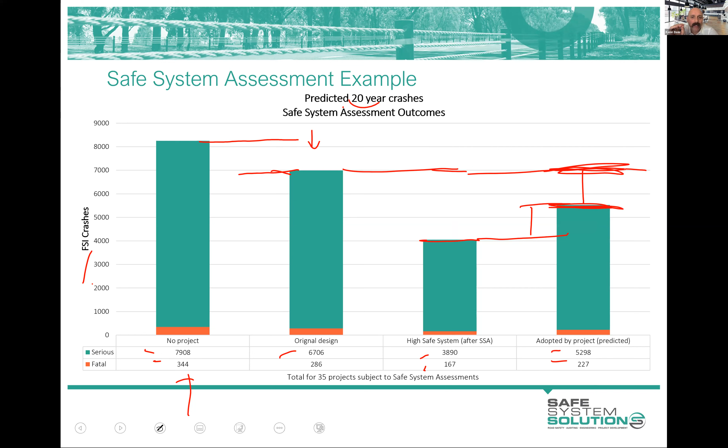But the difference between that and that difference, that's the immediate benefit of just going through the safe system assessment process. Because all of these original—no, I take that back, not all of them—I think it was 32 of the 35 or something like that, very close to all, had been the subject of a feasibility stage road safety audit. So it had that independent set of designs, and it had a little feedback loop, and it had been improved.

So this then goes to showing, just by the process, that you now understand that process and you've been through it, has the ability to get us that sort of gain by the alterations in the project—adding new things, altering things. So that's pretty exciting.

That's really exciting. The other thing that I suppose is of quite a bit of interest to me is this. We established pretty much straight off the bat in this course that the safe system is underpinning Vision Zero philosophy, trying to target zero deaths and serious injury on the road network going forward. We talk a lot about that—that's our aspiration. And so we're doing these safe system assessments, and even our highest safe system alignment is still got this residual of death and serious injury if they implemented everything we're saying.

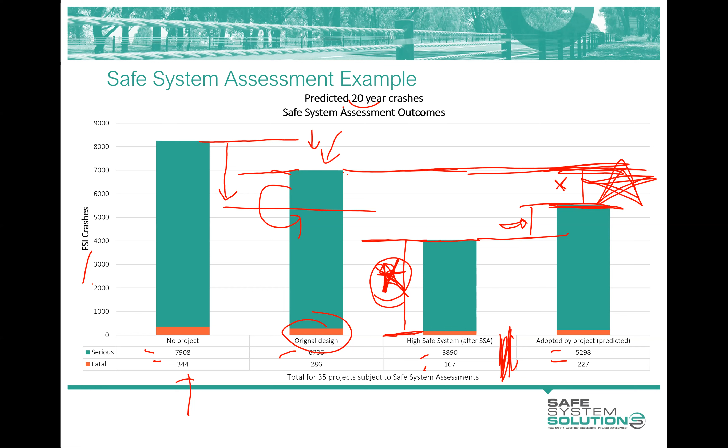Okay, all right. Well, I hope that sort of gives you a bit of an insight into, I suppose, some of the immediate value we can get.

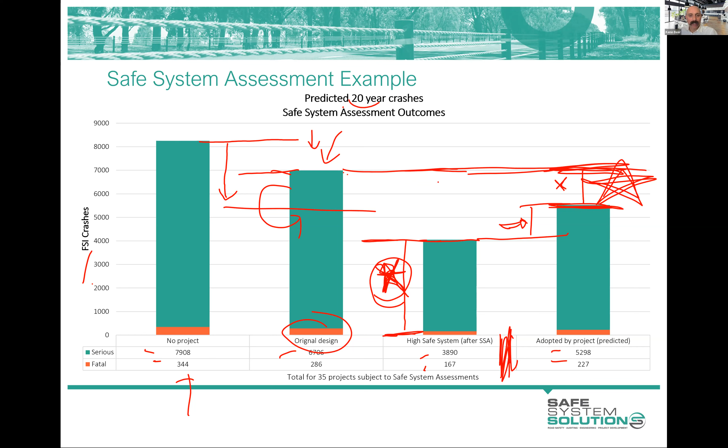Also setting expectations that the practice of doing the safe system assessment isn't going to eliminate death and serious injury. It's going to play a decent contributing role, but we need major, wide, holistic interventions across all sorts of areas, and we'll continue to work on that. Others are working heavily in that space, and you may be involved in that.

I took these dot points out of the Victorian Safe System Assessment Guidelines. I thought they were quite nice. I don't like slides with this many words, but I'll just quickly go through them. It lists some benefits of a safe system assessment - a way of determining how well a project aligns with safe system principles. I think you've already seen that.

Method to compare project design options from a safe system assessment perspective. And that's something that you've only got one design option to look at, but you could imagine if they had different design options at that intersection you're doing yours on, how you could score those and then get that comparative scoring, and you saw that in the example. Information on design changes that will move a project proposal closer to safe system objectives of eliminating the risk of fatalities and serious injuries.

Method to assist planners, designers and managers to move the safe system approach from theory to practice. And I think that's a really good one. It's too airy-fairy when you talk about principles of safe system.

Aspiration of no death and serious injury, humans make mistakes, shared responsibility, human tolerance to physical force. They're great principles that everybody generally gets on board. Executive directors, chief executives, ministers, they all sign up to it, but our decisions on a project on the ground, it's hard to sometimes translate those to practice. And this is that sort of conduit to do that. It's one of the ways we can really help do that. And it's a sound basis for future planning, design, and road infrastructure.

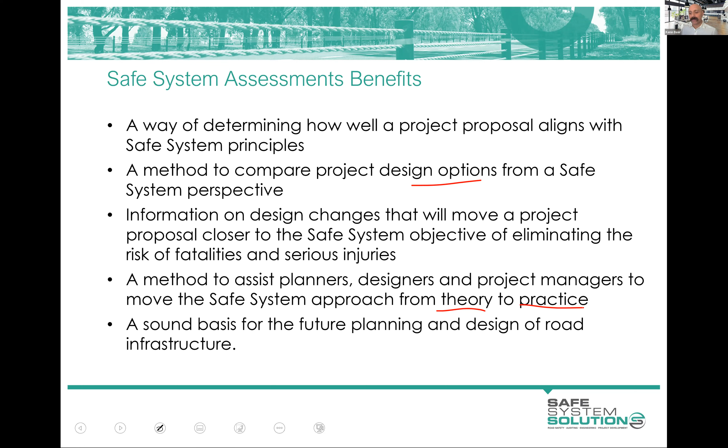But yeah, really important. The things you do to relax on a Thursday night, Ken, are different to, I think, what most people do. But I have shared that on Moodle.

There's a question that's come through. Once qualified, is there a period of on-the-job accompaniment we have to do with another accredited assessor, like the RSA system?

So I will cover this off shortly around what the different sort of accreditation schemes around the country are, and the like. They are nowhere near as advanced as road safety auditing is from that sense. A lot of jurisdictions, pretty much, you successfully complete this course, and that's it - you're out there doing it, off you go. But I'll show you a few other jurisdictions are doing shortly.

So good question there. Okay.

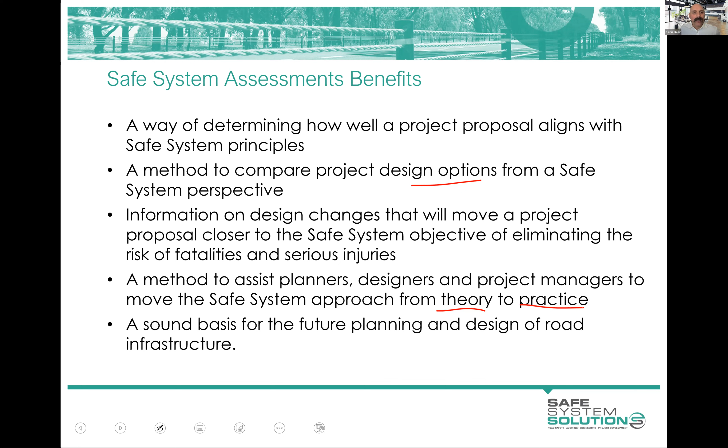Now we are going to have a break at some point, aren't we? How long have I drifted off down my tangents on? Okay, no, we're doing all right for time.

Let's talk about process guidance and the registration accreditation of what has started already. I alluded to this quite a bit, but the early stage safe system assessment is good within a project. If you take the project life cycle, a concept is developed, then drafts and details are put to it, then it's constructed and then open to traffic. The safe system assessment serves the purpose beautifully at those early stages.

Once you've got some meat on the bone of your design and you're moving into that stuff, I don't particularly find safe system assessments are the right tool. You can use them, but I'll tell you about a team I was in doing a safe system assessment that was basically about to be issued for construction. The project team said, well, we want this to align with safe system principles, so we should do a safe system assessment. So we're talking detailed design done, basically.

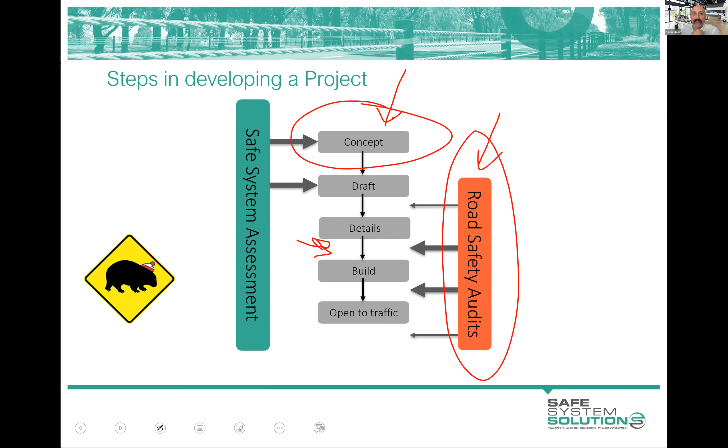Now, this is interesting. I did a little bit of a comparison early on, and Kathy will laugh because on the weekend I did an updated table of the difference between safe system assessments, road safety audits, and AusRAP, which I mentioned earlier, the Australian Road Assessment Program based on iRAP, just because I thought there was more to this. People often ask, what's the difference between a road safety audit and a safe system assessment? And then, what's the difference between AusRAP and safe system assessments and audits?

I completely sympathise with people on this, because it's getting complicated with the amount of assessment methodologies and tools available. They just keep coming, and that's all good because people are trying to find ways to integrate this. But I think we need a bit of clarity around what the differences are, where you'd use them, and what the purposes are.

So I did that sheet as well. I haven't actually put that anywhere yet, Kathy, so maybe we could send out an advanced copy of that to this group. I'll send that to you after the session and we can load it somewhere.

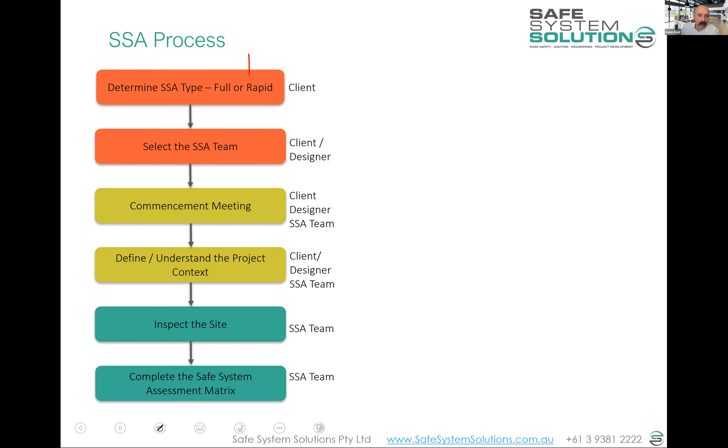Getting out on site, having a look there with the team - how does it interact with the existing road environment? How does it tie in? How are people using this area? The matrix which you're using at the moment, other safe system elements - as we talked about, those qualitative questions about people, vehicles, post-crash care. Treatments to improve safe system alignment - so recommendations, essentially we often call them things for the project team to consider, considerations.

It's all written up in a fairly consistent manner, and you're starting to use one of the templates already, so we're fairly consistent with that. Then it's all handed over, and the designer, the project manager, the client responds to those changes or suggestions, and amends the design and the project to incorporate what they've agreed they can actually do. And then those are taken forward.

So sometimes at about this stage, there's a little feedback into doing one more scoring of the final design, so that you can create a nice little graph - remember lower scores are better here - of initial design, existing conditions, initial design after safe system assessment, initial SSA. Why would that be useful? Well, that's a pretty powerful thing to show your director, your executive director, your regional review committee, whatever it is. You've done everything you can as a project team to get the best alignment with safe system principles you possibly can, because you've had that independent check, you've integrated things in, and you've got it all the way down there. So I think that's a neat way to do things often.

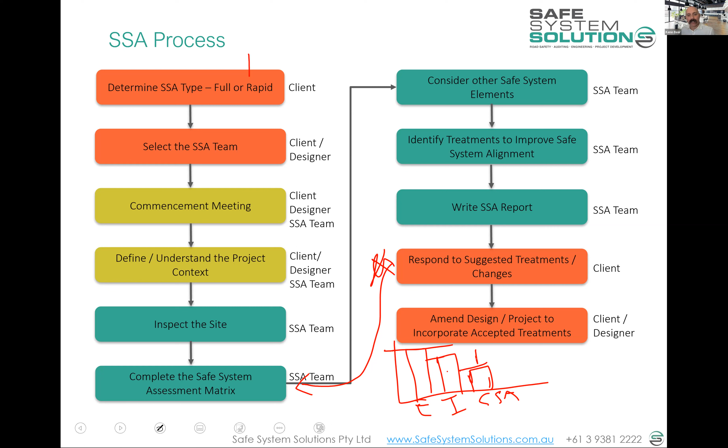Okay, so pop your questions in if you have any about the process, and I'll just show you a little bit about that accreditation registration, what some of the jurisdictions are doing.

As I mentioned, it's a bit varied across Australia and New Zealand what's going on. I'll talk Victoria first, then South Australia, then go to some other jurisdictions. Victoria has got a safe system engineering page on the VicRoads website, which will probably be the Department of Transport website at some point, but still VicRoads. They've got this safe system assessment section with the guidelines and the templates that you're using, and it clearly says please rebrand the templates, use them yourself, off you go.

But it's also got this register of recommended safe system assessors, and this bit talks about growing this list, and this is how you get on it. You express an interest to go on the list, although you don't really need to do that, but you can. You do this course, and it's actually specified there to do that. There is an option to do something else if it exists to get your head around it, but really, the practice is to do this course. Then you need to gain firsthand experience by undertaking a safe system assessment, facilitating a workshop, that commencement meeting, going through that, producing a safe system assessment, and then you submit that to the safe system assessment team. You email it through, and they review it and give you feedback. If they say yep, this person knows what they're doing, we're okay with that, you get onto this register.

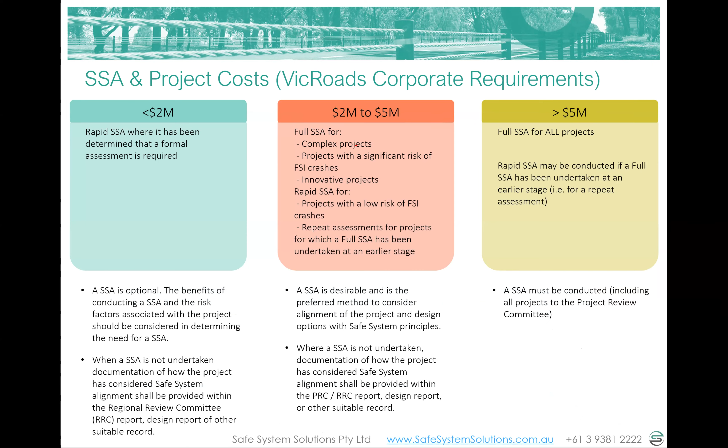Just back on the process, is the link between client, designer and SSA team similar to RSA? My experience is that the client delegates the response to the designer, the traffic engineer.

I would say in safe system assessment, the client is a bit more connected and engaged with that responding point. Yes, the designer is obviously going to be involved, but because of the nature of these usually being some significant scope alterations, there is a closer interaction with the client and the designer. Certainly the designer needs to ensure it's feasible and it can happen. The client, the project manager, the road controlling authority, whoever it is, is a bit more engaged in some of the wider implications of that - what they believe community acceptance would be, political acceptance, organisational policy, wider environmental cultural heritage, although the designer is usually very good at integrating that.

But there, I would say it's a bit more - whereas if you're in a detailed design stage road safety audit, for example, it's really the designer who can nut out most of those particulars, in terms of flare rate of barrier, or particular super elevation twist in the ramp, or those sort of things. They're so specific and nuanced that the designer can just close themselves away and nut that out.

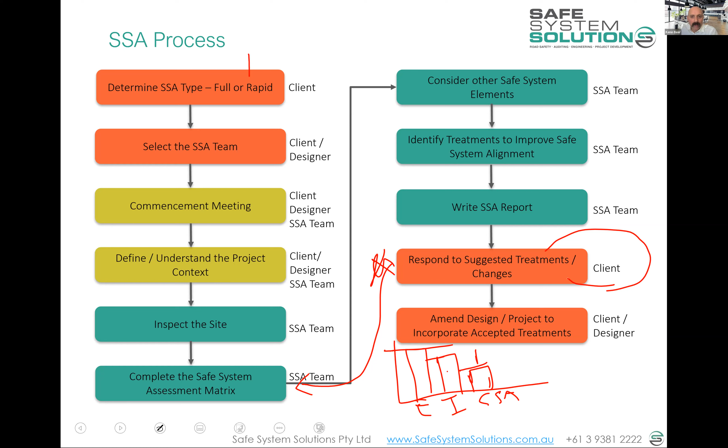And does the SSA team need to be independent from the designer client to avoid conflict of interests?

I'll give you a complicated answer on that. In theory, no, not as much. In practice, yes. The original intent of the Safe System Assessment Framework and how it was put out there was not to have it as a completely independent process, but to give project teams the ability to do this themselves, to think it through, to utilize that system.

In practice, most jurisdictions are following a similar line to road safety audits in that independence, and just saying, well, we will get independent assessments, safe system assessments done just the way we would road safety audits, because it's clean, it doesn't have any conflict of interest and the like.

But I suppose the slight difference is, if you have your own project, you can run through the safe system assessment process and the matrix and get some scores out to help inform what you're doing. That's a nice internal process to do. It's usually when it's put forward to a business case and the like where you would expect to see some independent eyes on that. And now when I say independent, road safety auditing is kind of clear cut on that, real determined independence.

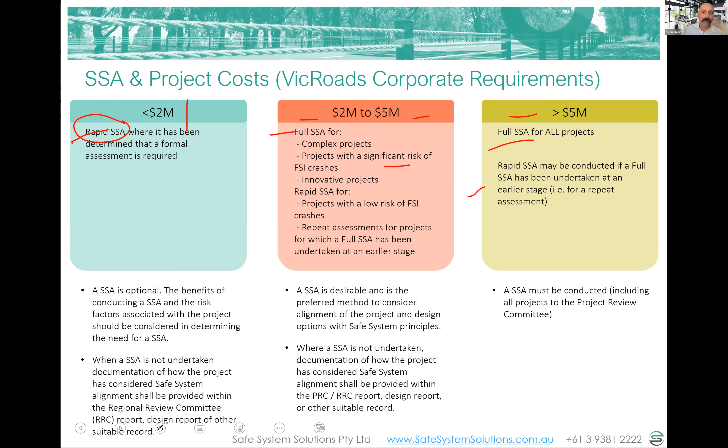And what is that difference? Well, it's not like one is a 5-minute exercise and one's a 5-week exercise. They're actually somewhat close in scope. The full safe system assessment has that commencement meeting, looking at the background, workshops, site inspection, existing conditions, and all the design options are reviewed and matrices produced.

Those other safe system elements are looked at, proposed changes, the full report, and changes done by the project team. So the rapid has a few less of these. I'll just note the ones that may drop off. So the commencement meeting may not happen, sort of commencement meeting, workshop, discussion about that.

The workshop, that may not happen. Site inspection may not happen as well. Now, most rapids, people still do a site inspection, but there is that opportunity to do it at a desktop level.

You're still doing the matrix, but you don't consider the other elements of the safe system in a rapid, so you don't do those qualitative questions. You're really just spitting out the scores and the changes you believe from an infrastructure perspective. There's a lighter report done, and everything else is the same.

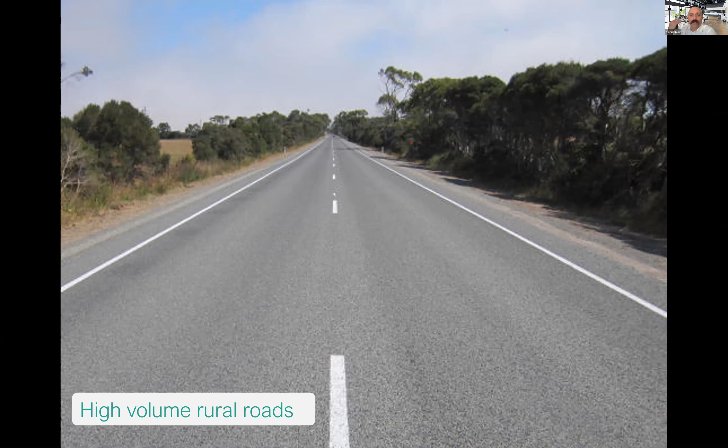These higher volume roads, the A roads, maybe B roads, the M roads and the like, are going to get the big investment, so the speeds can be higher, because these are providing those freight routes, those major connector routes in an arterial sense. So we would expect to see central barrier systems, outer barrier systems. It's going to cost a bit, but that's the price we're going to pay as a society to keep those bits moving at higher speeds.

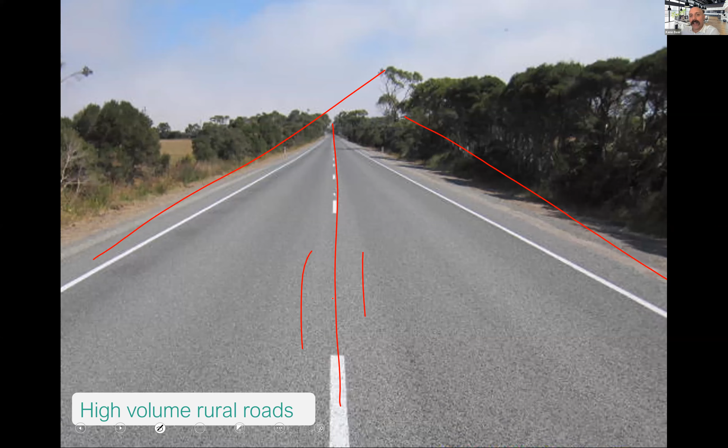We do want to see all the things to reduce the likelihood of crashes as well—audio tactile, widening the center line for the barrier, and the like. And when we get to intersections, we want to manage that speed and angles for passenger vehicles. It's a nice setup where you have central barrier systems and then a roundabout at a location like this. The reason for that is you can collect some access points and not have to have breaks in the barrier, and you can bring them down so they can U-turn if they need to go the other way.

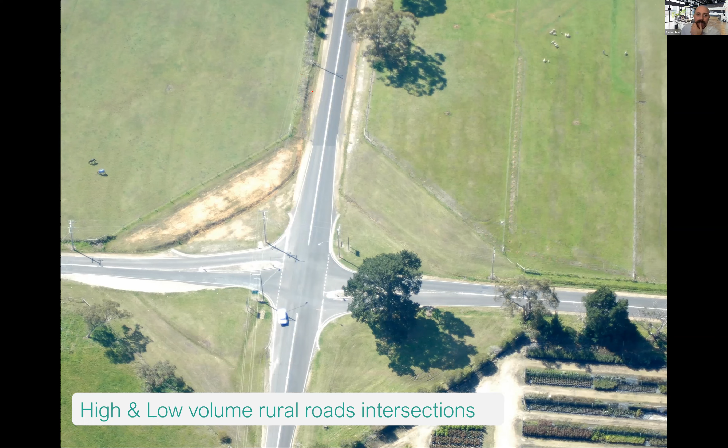So that's the theory on it. Yeah, it can be expensive. There's some good examples rolling out now. There's a good Austroads project in train on barriers in narrow medians and cross sections and the like. So keep an eye on that.

High volume outer arterials—these are generally major traffic routes often, and so we're looking at separation of vulnerable road users. We need to get that off there if we want to, because these get operated usually at 70, 80 kilometers per hour, and we can't have that.

To get high alignment with safe system principles, separation is required for vulnerable road users. These are often areas where we'd expect to see underpasses or overpasses for pedestrian separation, plus mid-block areas and intersections getting reduced speed through raised safety platforms, signalised roundabouts, or similar treatments to bring down conflict point speed and severity, as well as continuous barrier systems.

Moving on, if you're in these major traffic corridors, making it a little more like an urban motorway style with slower points at the key conflict points, and completely separated facilities for vulnerable road users, trying to achieve that separation.

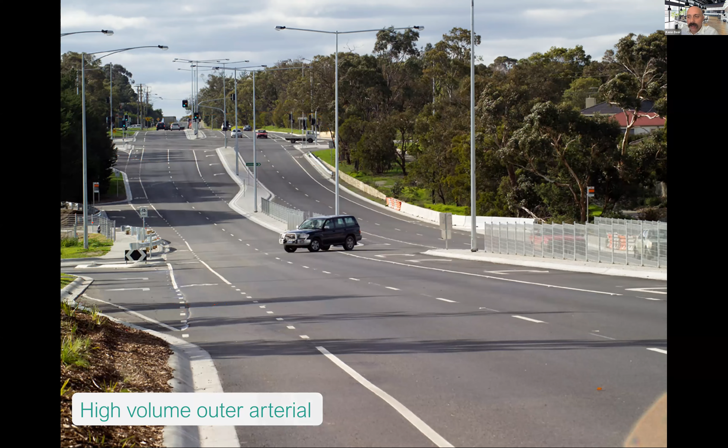Two more: your motorways and major urban freeways are actually interesting in terms of alignment with safe system principles. From a likelihood of crash perspective, and often severity of crash perspective, it's quite good. The volumes are massive, but we do see high quality infrastructure from those perspectives.

Where we see things go bad is often as the flow breaks down. When the freeway is free flowing, it generally has a low likelihood of crashes. When it's absolutely congested, it again operates pretty well from a safe system perspective because crash severity is low since speeds are low - though likelihood is up because people try to nose into another lane for advantage. But as we see high speeds and the flow starting to break down, that's where likelihood and severity go up because of the speed, leading to end of queue issues, rear ends, and some runoff road.

But concrete barriers aren't the most flexible. They're much better than fixed hazards or drop-offs and those sort of things, but there's a bit of rigidity to them, so a bit more energy transfer.

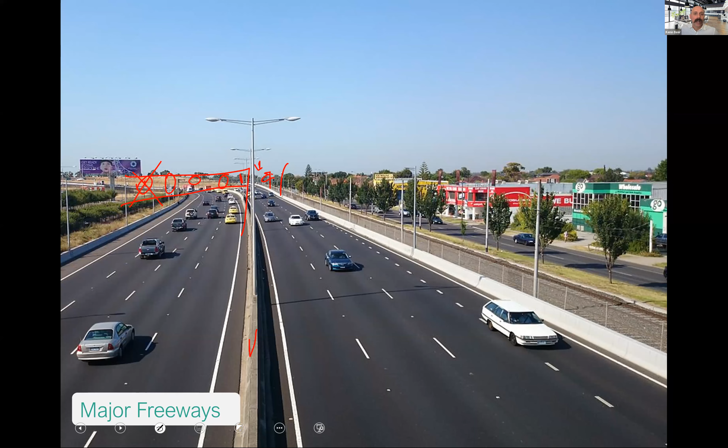If you see from the saturation of vehicles, headways and the like that it's about to start going into flow breakdown, you can proactively reduce speed through speed limits. If there's incidents, you can block off lanes. These get into a bit more of an ITS style space and thinking, so safe system assessments of these take on a different flavor, but you're still thinking about some of those other perspectives.

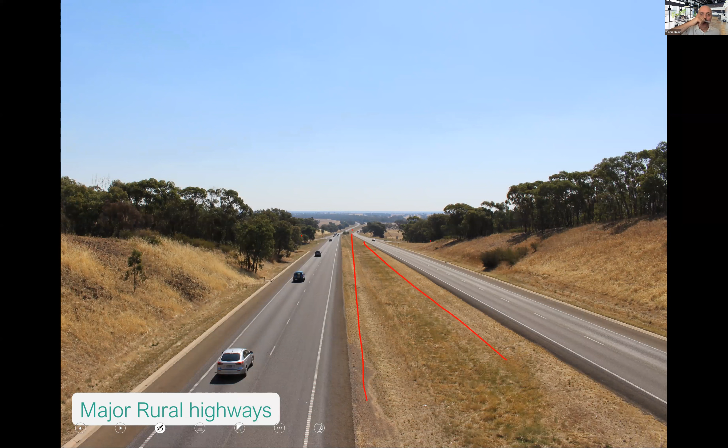Finally, major rural highways. We've talked about this, but really we wouldn't expect to see these built this way anymore - continuous barrier systems inside and outside are definitely the go. Building them originally, and we'll see this in the Austroads report when it comes out, is there a need for this much width in the middle? Because you're going to have to put a barrier system down the middle anyway, unless you're catering for future widening maybe.

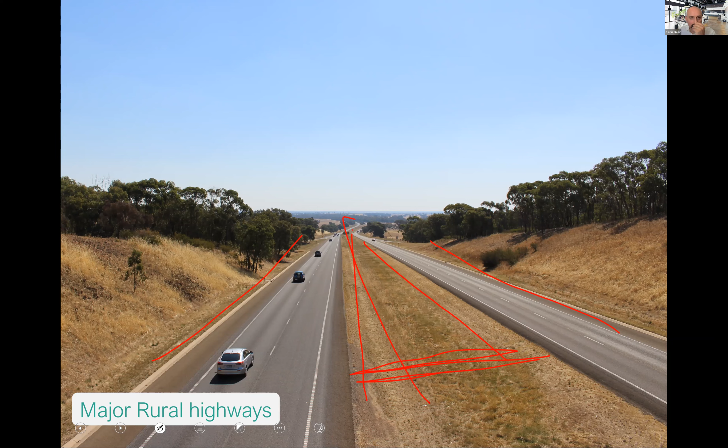Generally we'll see continuous barrier systems to maintain high speed, understanding that some people will still leave their lane or the road, and they should be able to do that without being killed or seriously injured - there'll just be some damage to the infrastructure and their vehicle. Intersections themselves should be grade separated, or there's the potential for that if trying to maintain speed. I always still question, can we put a roundabout in? But on the national route, I don't like to do that as much, because it slows down all the trucks and everything going through these areas.

But you can do a fairly well-aligned safe system intersection at grade, which involves - I'm going to draw all over this screen now - you've got a side road coming in, and the major road, maybe with some separation, and of course you're going to have continuous barriers. That makes sense, but how do you do that? It really involves creating a long acceleration lane, and then a U-turn facility, probably further down the road.

You've got to have enough space to accelerate, with sort of separation on that. Accelerate, nicely change lanes, U-turn, acceleration lane back, and enough time to change and go through there or continue straight. So then you have the ability to block off that. Now there's a bit of space and land required, but you basically are able to get up to delta V's that are acceptable, change in velocity of anything there, in both ways. The merge from the right's not ideal, but it's there, and you don't have that right angle crash issue, and it's a decent way to go, a lot cheaper than that grade separation, and doesn't impact on through traffic travel speed. So those are the kind of things we can look at.